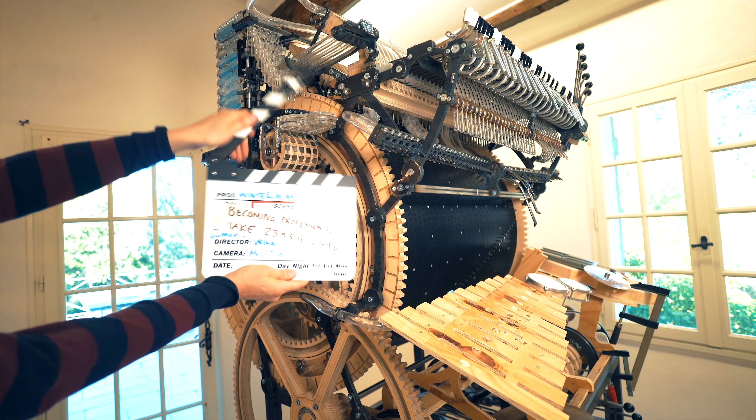Using these PMMA pipes for marble transportation everywhere in the machine was a stroke of genius. It works so well and it looks great. But these pipes are 22 millimeters in diameter and the whole machine is built on a pattern of 21 millimeters. Up here in the machine we have only 21 millimeters of room for each pipe.

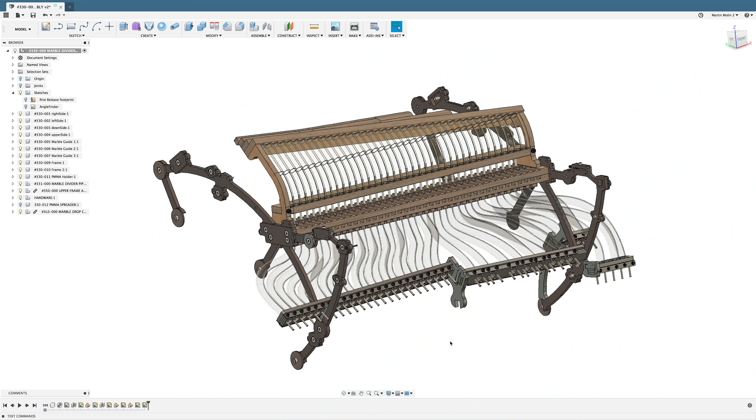So today I'm going to create a cool transition from the 21 millimeter center to a wider pattern that will fit the 22 millimeter pipes. So here's the marble divider. You can see the PMMA routing that we were going for, and we can see that this is the part that is now holding the PMMA pipe. I want paths going from the 21 millimeter down here where we have a distance of 22.1 millimeters.

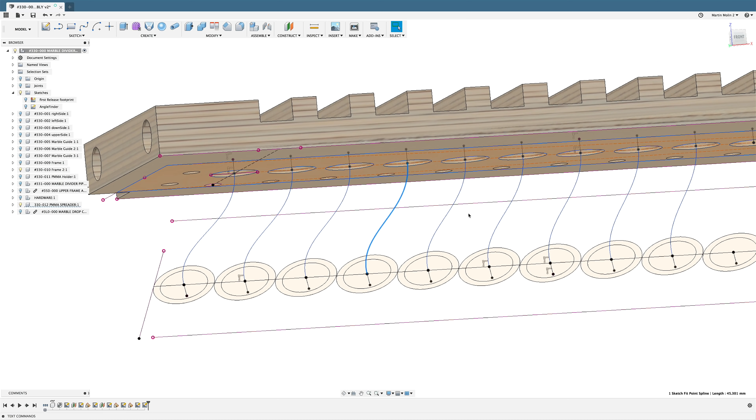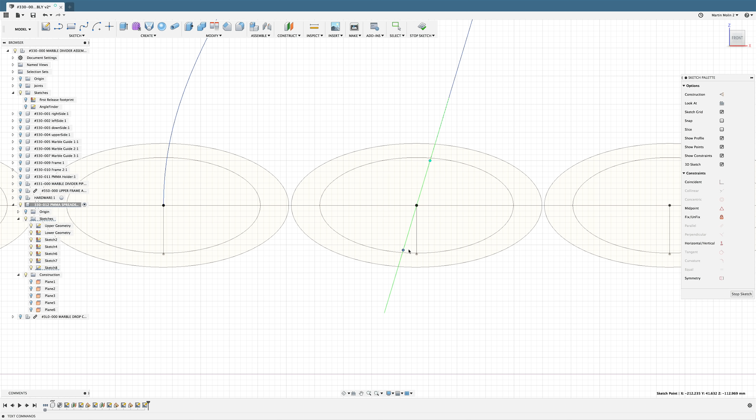These splines, these curves here are 3D splines. Normally you sketch in 2D, and I just developed a great method of doing that. So I go into the spline sketch, and I take it from this point and I try to choose this point. The second point I'm choosing here is located on another plane, and that's how you create a 3D spline. But as you can see, the spline is still straight, so then we need to constrain these green lines that are controlling the curve of the spline.

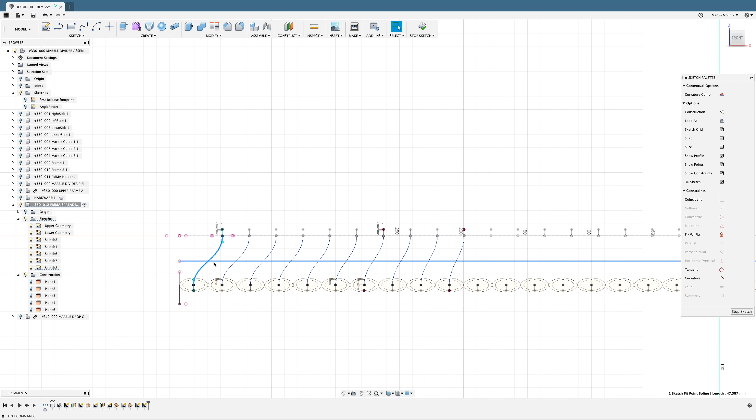So I'm gonna hit coincident and I'm gonna swerve around and choose this point, and I want to constrain it to our perpendicular line like that. And now look what a nice curve we got. And then we just have to do the same up here. Bam! Perfect. Here comes the best part of all. All these lines are individual. You can see the leftmost line has much more curve than these lines because of course the distance is growing the further out we come.

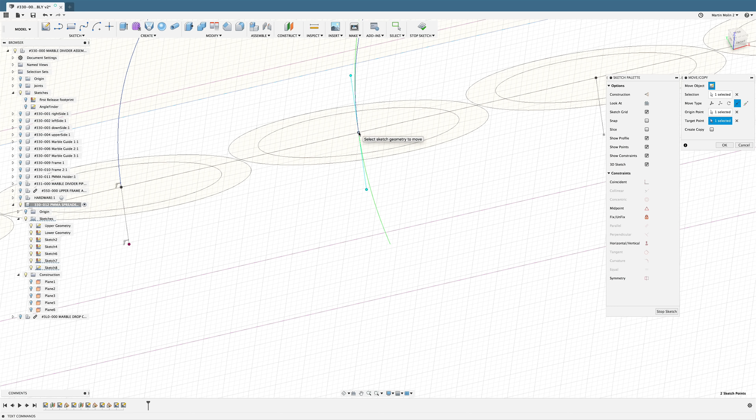So I can take this line, copy it, paste it, move it over 21 millimeters, hit enter, right click this point, choose move, point to point move, select this point and move over to that point. Hit enter and I have a unique spline. This is different than that one, but it's a very automated workflow.

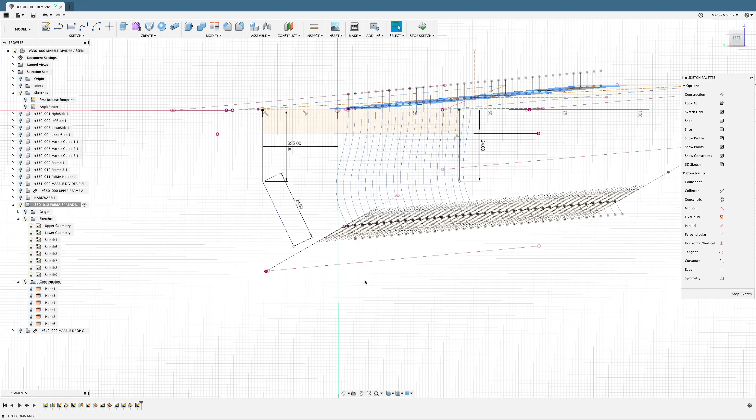I'm now working on the plywood pieces that I will use to build this up. I want this line to meet this line, and I don't want to use more plywood to reach there, so I'm thinking I can change the angle of this line. And this is where parametric design is so wonderful, because these sketches are made on a plane. I edit that plane and I can just change the angle.

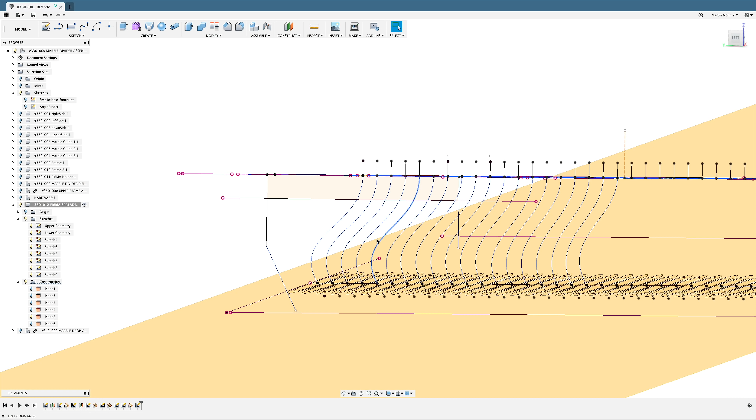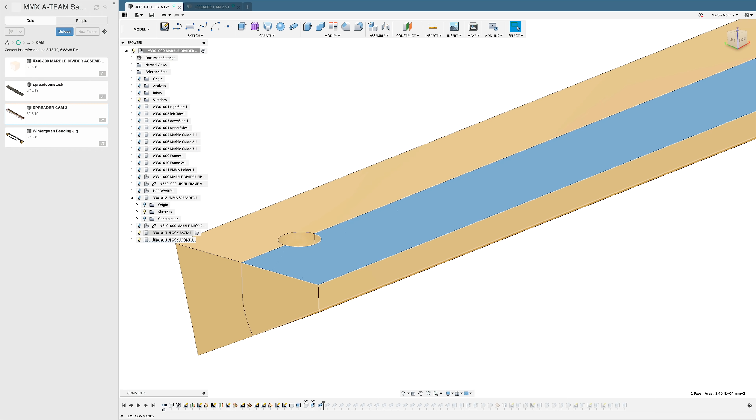And I'm creating a pipe, but I'm not doing it to make a pipe. I'm doing it to make a cut. So I'm gonna hide this front plywood block. You now see that it's a cutaway. We can mirror all these holes over this mid-plane. Anytime you have something symmetrical to design, think mirror.

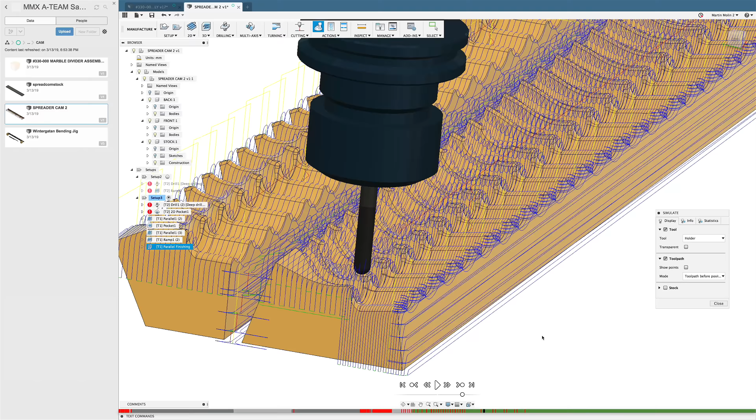So let's fast forward through the whole CAM work where I made all the tool paths and we ended up with something that looked like this. I can post-process this G-code and go down to the CNC machine.

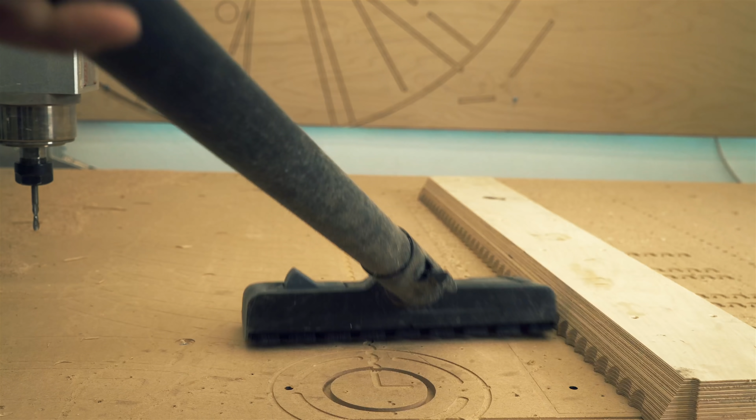So this angle here is impossible to cut from above. That's why I'm machining this from two sides. All these positioning holes are symmetrical from the midpoint, so I can turn it this way and everything lines up.

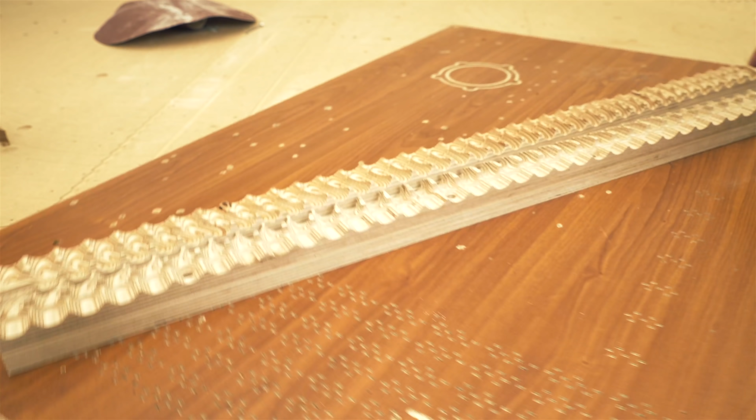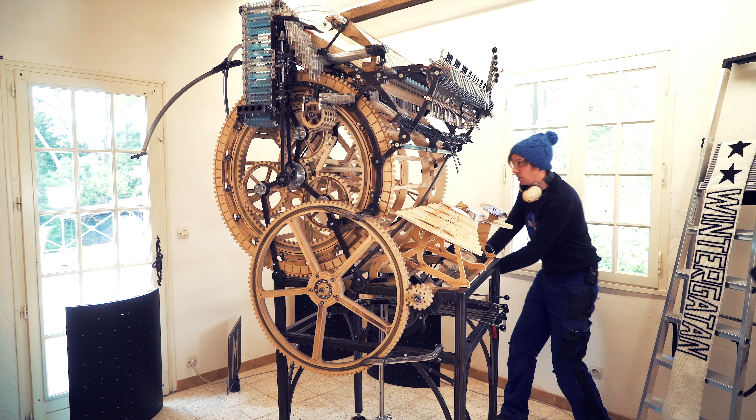In order to access the area where I want to mount this new spreader, I needed to remove the programming plates. Now I'm gonna show you the start and stop. Connecting the flywheel. Stop the machine, flywheel is still going. So I want to start again. What about that?

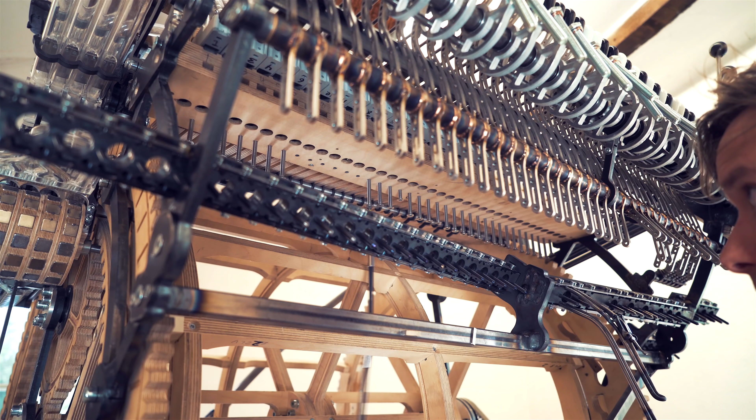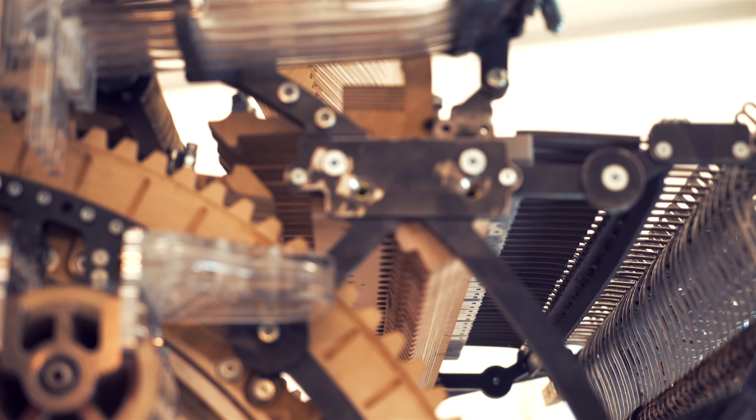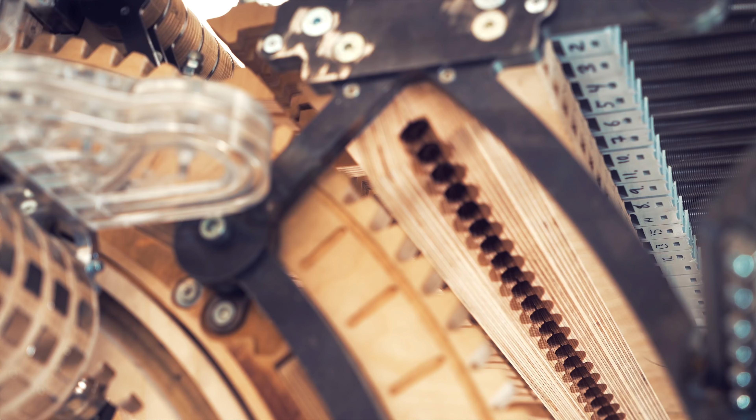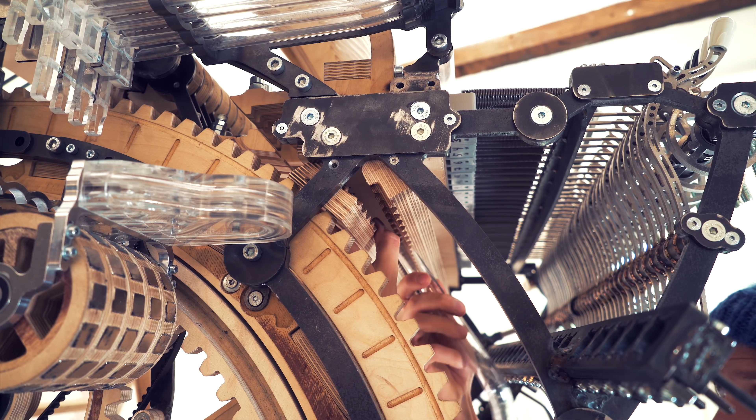It's held in place by a perfect press fit. Perfect. Perfect. Try channel 2. There we go. So when I'm working with the tubes, I can just push this up and away. Then when all the pipes are in, I can just wiggle this into place.

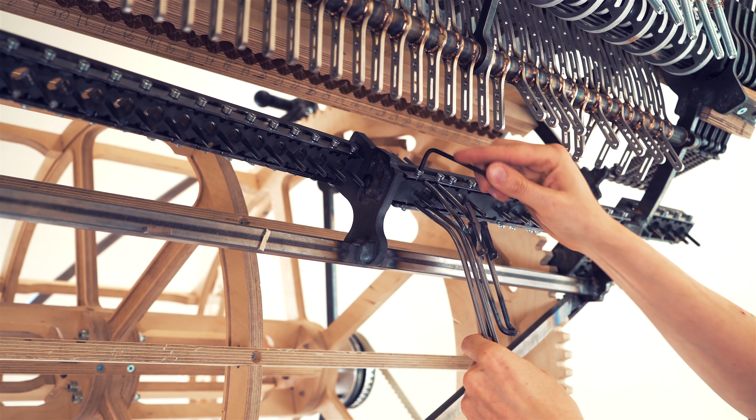So pretty soon, I'm about to sound check the kick drum. So I'm thinking we should bend the kick drum PMMA tubes. So I'm using TIG filler rod to create a template. Now I'm gonna cut it off.

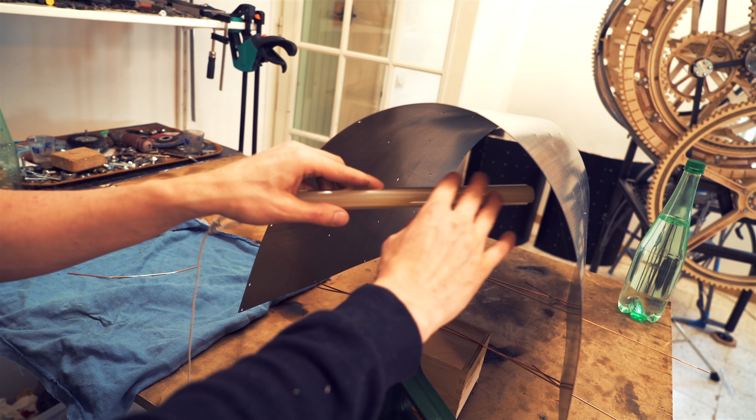So this is an idea I wanted to try for a long time. I just mocked up a little heat shield here. So when bending these and heating them up with a heat gun, the heat is not really so even, but the heat shield will create a little bit of a heat bubble here that will heat up the PMMA more evenly. That looks pretty nice. So now I'm gonna make a little mark.

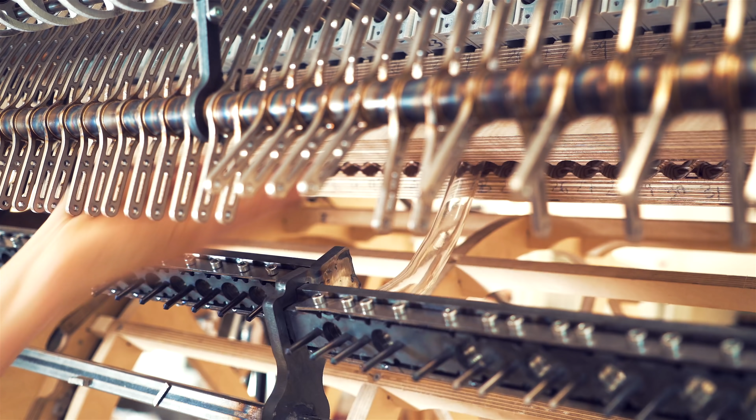Seems to fit great. Pushing that temporarily in place. If I press here, will I get a marble here? One done, 37 to go, but this fits so easily up there. The whole purpose of this spreader is to make it easier to put the pipes next to each other. So I'm gonna make a second pipe to try that out. So I bent the second pipe. Awesome. Awesome.

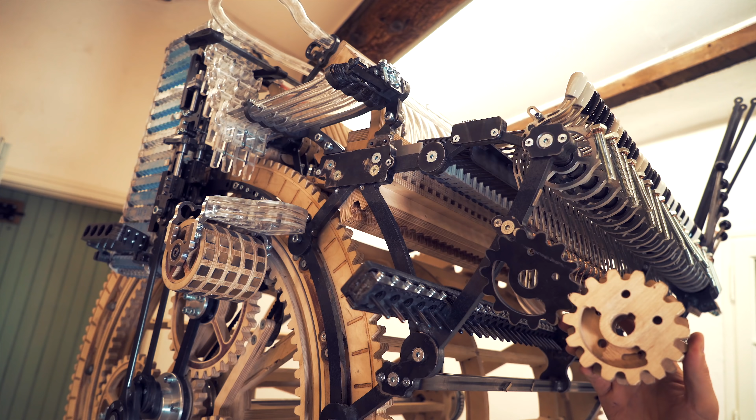I think it's fun to show you these complex 3D shapes that you can make on a 3-axis CNC by splitting the design in the middle. It's a good trick. It can be very useful. It's 2 steps forward, 1 step back, but this was a step forward.